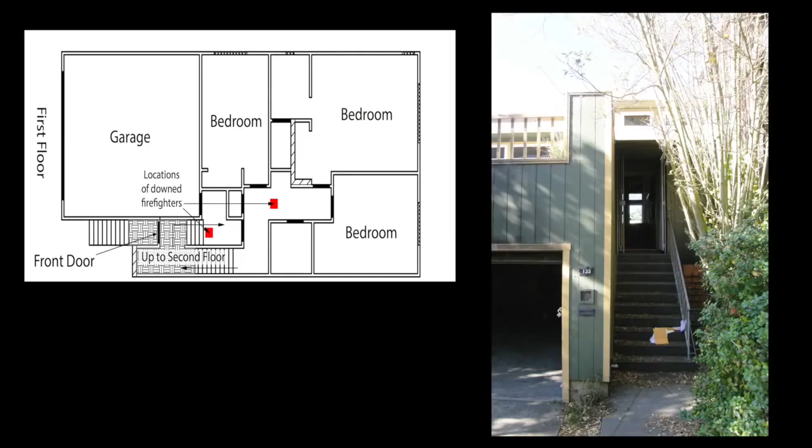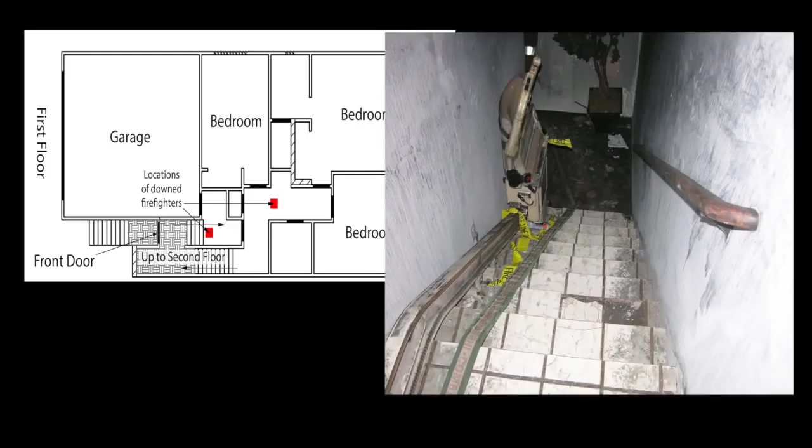At approximately 10:54, about 6 minutes after the arrival of Engine 26, Battalion Chief 9 followed the Engine 26 hose line up the front stairs, into the front door, and then down the stairs to the first floor or street level of the house. Battalion Chief 9 had a face-to-face discussion with the victims.

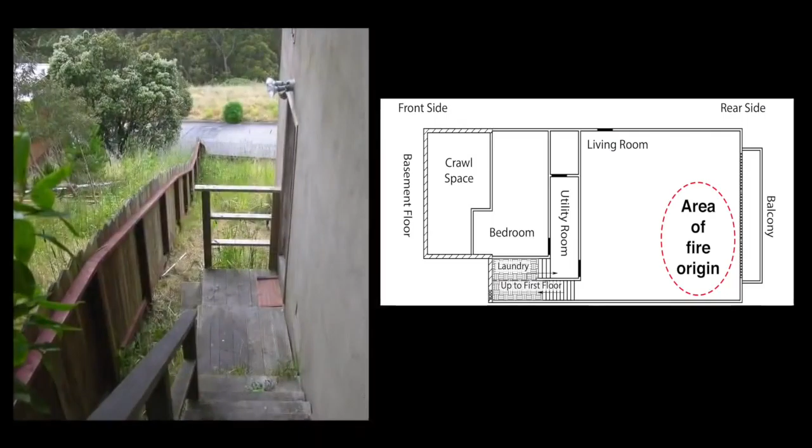During this discussion, Engine 26 confirms that the fire is below them, and Battalion Chief 9 indicates that the attack will be made from the basement level on the B side. The battalion chief exited the building.

Engine 26 remained in position near the top of the stairway leading into the basement. This was the last communication with the Engine 26 crew members inside of the structure.

Within 11 minutes of Engine 26's arrival on the scene, the large windows that made up most of the side C wall of the basement level began to fail due to heat from the fire. As the windows broke, fresh air mixed with hot fuel-rich gases in the basement, which increased the heat release rate of the fire. The increase in heat release rate resulted in the rapid failure of the 6 window panels. It took less than 2 minutes for all of the windows to fail.

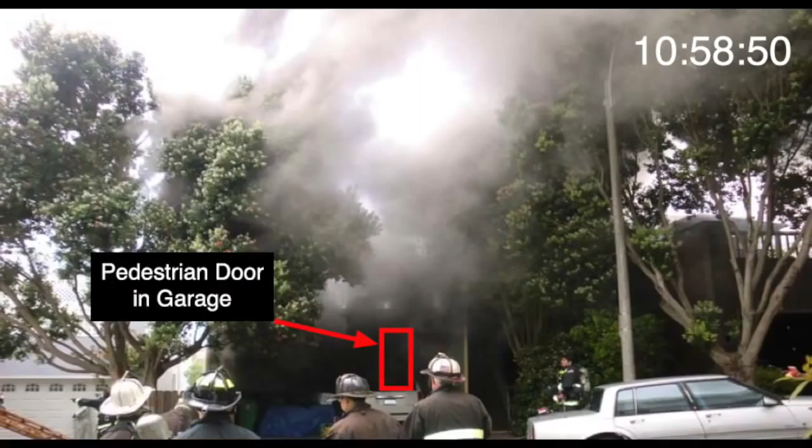After the rear basement windows began to self-vent, Engine 24 and Rescue 1A tried to make entry through the pedestrian door in the garage to attack the fire, but they were forced back by extreme heat and heavy black smoke. With the pedestrian door between the garage and the first-floor hallway open, heavy black smoke began flowing out of the open garage door at street level on Side A.

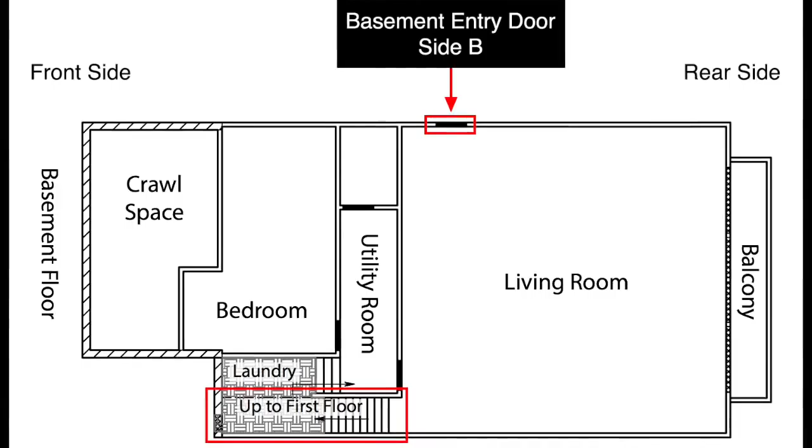Within a minute of this change, the Side B door on the basement level was forced open. Battalion Chief 9 reported heavy fire and smoke. Engine 11 tried to make entry into the basement, but they were forced back by the heat. Battalion Chief 9 requested a second hose line.

Incident Command attempted to contact Engine 26 several times via radio, with no reply. By 11:02, both Engine 11 and Engine 32 had made entry through the Side B door into the basement and initiated suppression operations.

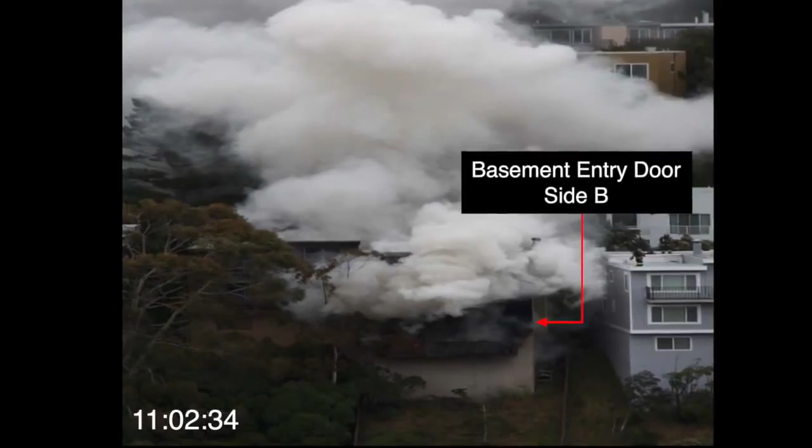At approximately 11:08, the lieutenant and firefighter paramedic from Engine 26 were found in the first-floor hallway between the top of the stairs from the basement level and the door to the garage. Both of the Engine 26 crew members died of their injuries sustained in the fire.

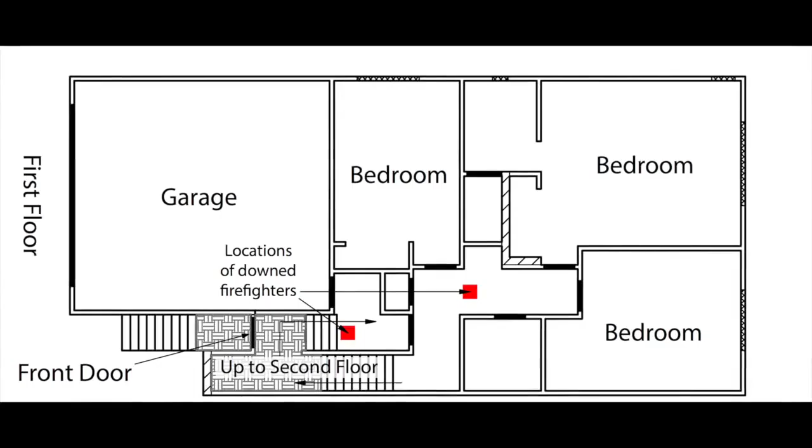NIST's Fire Dynamics Simulator, or FDS, was used to provide insight into the dynamics of this structure fire. The results of an FDS simulation are visualized with another NIST program called SmokeView. The inputs and details for the FDS simulations are documented in NIST Technical Note 1856.

The fire started in the basement, near the balcony windows on the rear of the structure. The fire spread to a large sectional sofa in the center of the basement living room area.

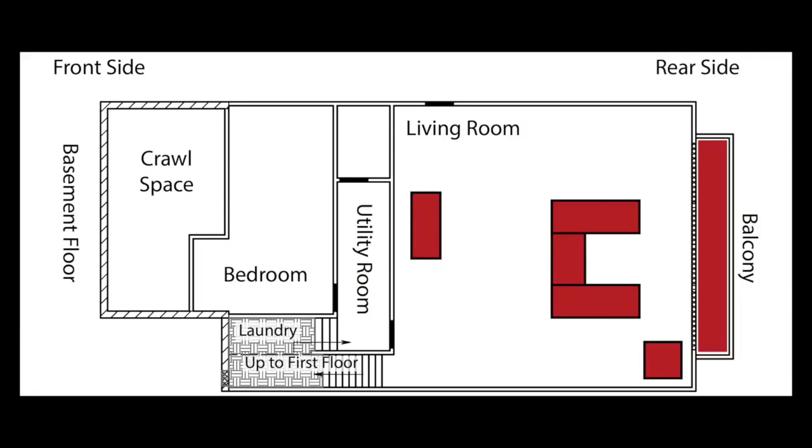Based on an assessment of the fuel load in the burned area of the basement, the estimated peak heat release rate of the furnishings and interior finish was approximately 20 megawatts. However, the lack of oxygen limited the fire growth until the rear basement windows vented.

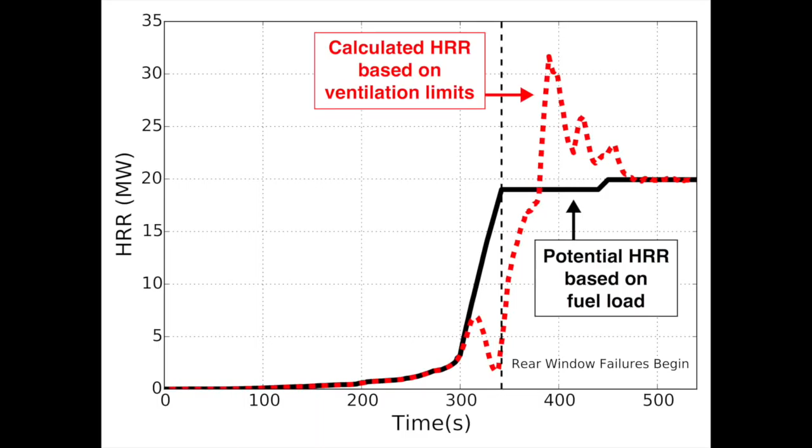As seen in the heat release rate graph, after the windows failed and allowed additional oxygen to mix with hot fuel gases in the basement, the fire rapidly increased from less than 5 megawatts to more than 25 megawatts in less than a minute after the first window self-vented.

The comparison of a photograph from the incident and from the simulation shows the condition on the front side of the house at street level, as the rear basement windows were self-venting.

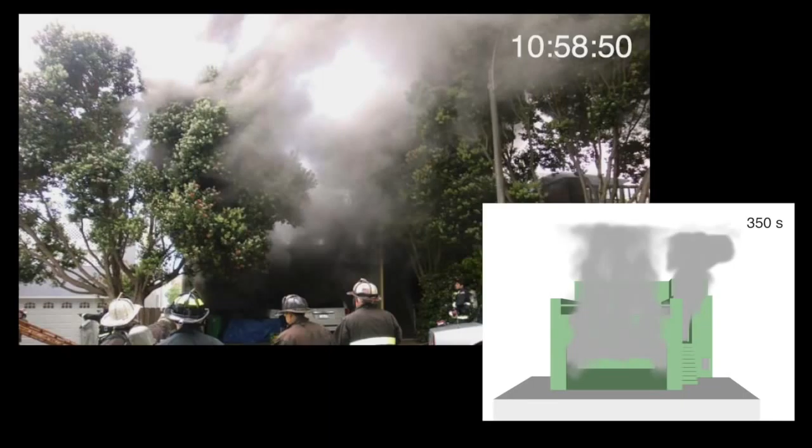Now we will use output from the simulation to understand the flow path within the multi-level structure. Fire gases move from regions of higher pressure to regions of lower pressure.

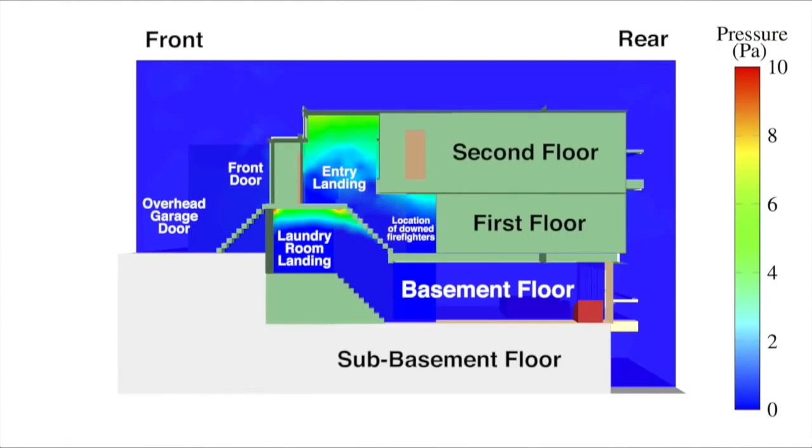This video shows the pressure plane along the center of the stairway from the basement to the laundry room landing between the basement and the first floor. An estimate of the pressure increase is shown before and after the first basement window failed.

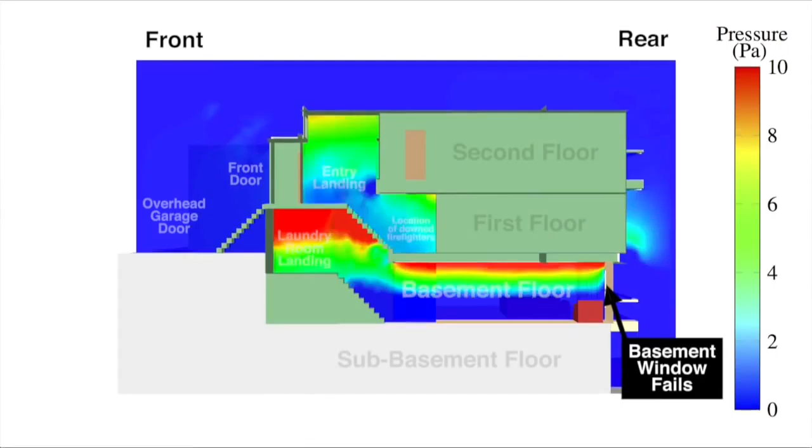This video shows the pressure plane along the center of the stairway from the basement to the laundry room landing between the basement and the first floor. An estimate of the pressure increase is shown before and after the first basement window failed.

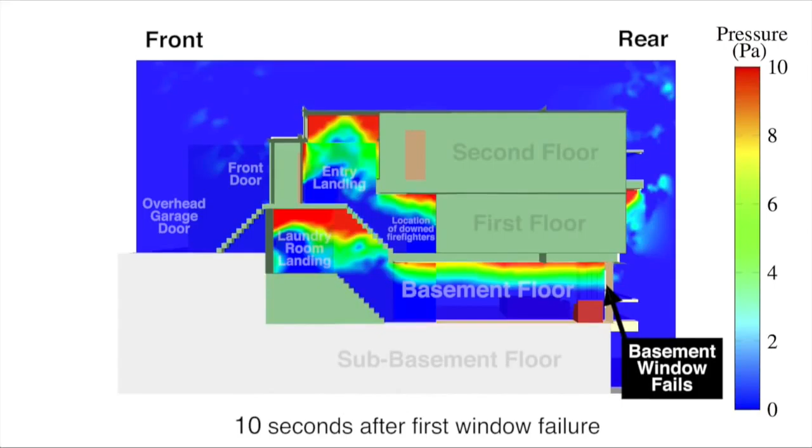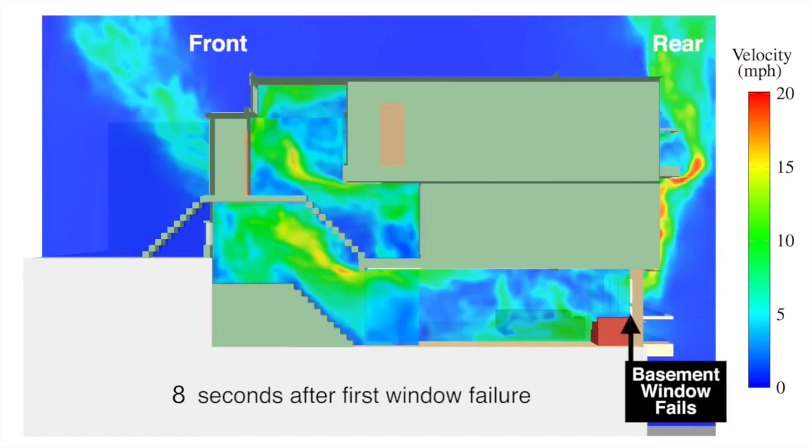One of the hazards to firefighters located in the exhaust portion of the flow path is convective heat transfer from the fire gases. Convective heat transfer depends on the velocity, the amount of turbulence, and the temperature of the fire gases. This video shows a comparison of gas velocity estimates in the stairway before and after the basement windows self-vented.

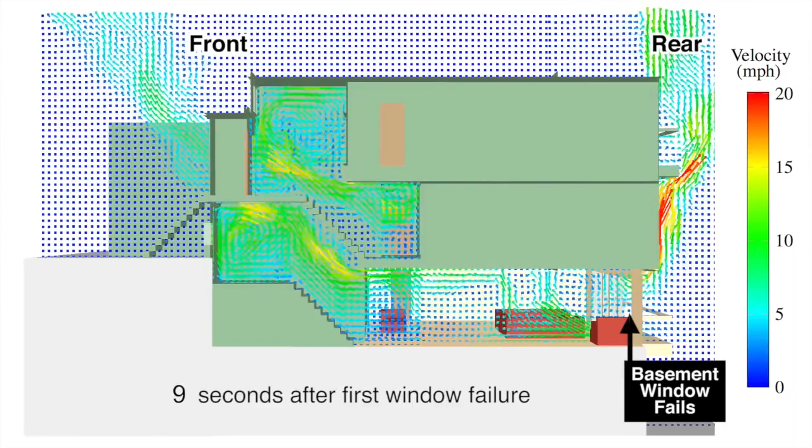Another way to visualize velocity with smoke view is by using arrows or vectors. In this video, the vectors show both gas flow direction and gas flow speed. This is also representative of the amount of turbulence or mixing within the flow path. Notice the gas flow circulation pattern on the landing, which indicates a very turbulent or well-mixed flow.

These images show the flow path from the fire on the basement level 2 minutes after the first basement window failed. At this time, all of the rear basement windows have failed. The hot gases in the basement are flowing up the stairwell, then splitting on the first floor, with some of the flow continuing up another stairwell to the open front door, and the rest of the hot gas flow moving out of the open pedestrian doorway through the garage.

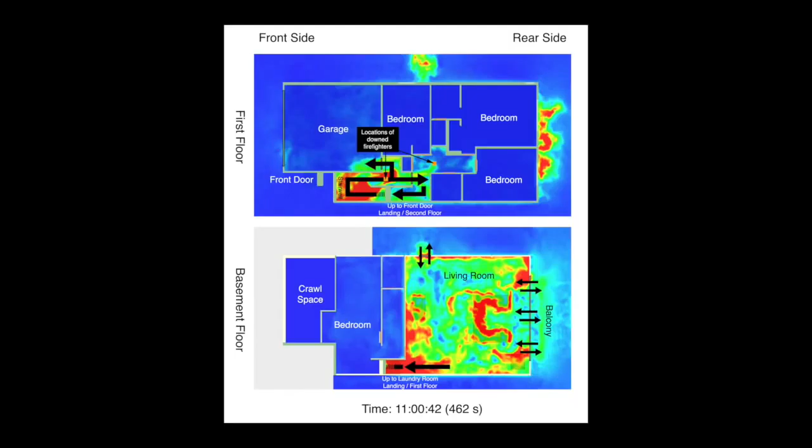Notice that the open basement windows on the rear of the house serve as bidirectional vents, with fire gases exiting the upper portions and air entering the lower portions. While on the front side of the house, the front door and the door to the garage are unidirectional vents, serving only as an exhaust for the fire gases.

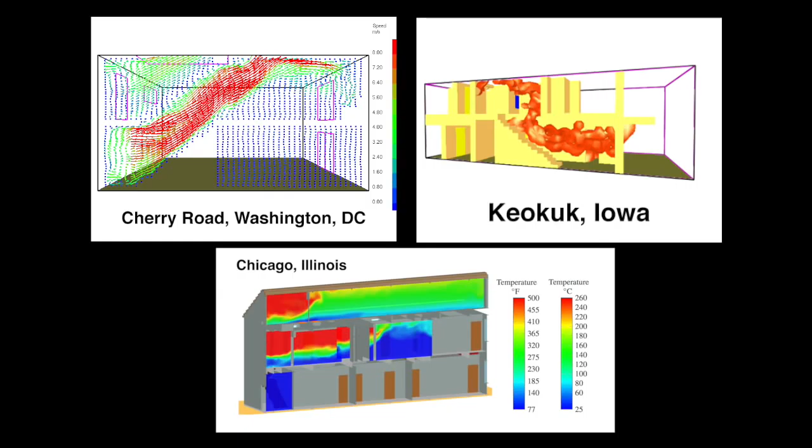There have been many previous fire incidents in which changes in the flow paths have had an adverse impact on firefighter and occupant safety. Fires with rapidly developing or changing flow paths are a significant hazard to firefighters. The development of a flow path could be caused by the failure of a component of the structure, such as a door, window, or portion of a ceiling, wall, or floor.

Environmental conditions, such as wind, can generate hazardous thermal conditions within a flow path. Stay upwind of the fire or keep the wind at your back. Uncoordinated ventilation or uncontrolled doors can also be the cause of increased thermal hazards within a flow path.

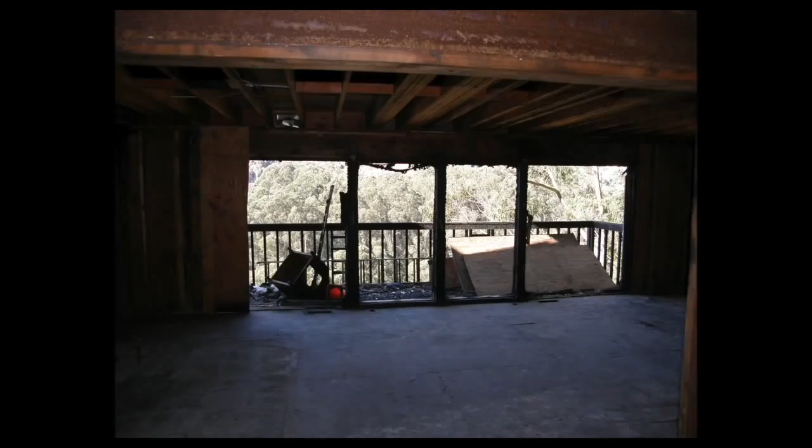In this fire incident, the thermal degradation of vinyl-framed windows and sliding glass doors resulted in the self-venting of a wall of windows 19 feet wide on the rear basement wall. The window opening allowed hot gases to flow out of the windows and mix with oxygen, which enabled the fire to spread up the rear of the structure.

Oxygen entrained into the structure enabled additional fire growth in the living room area of the basement. Failure of the rear windows resulted in a rapid increase in temperature, velocity, and mixing of the fire gases in the stairs and the first floor hallway. Conditions changed from tenable to untenable within seconds.

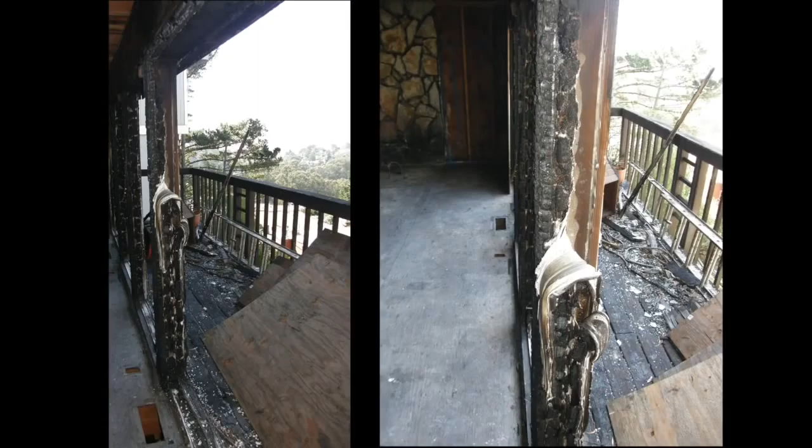Prediction of the failure mode and failure time of a building component is not a reasonable expectation given the large number of unknowns that firefighters face on the fire ground.

Research has been conducted by NIST and UL with fire departments across the country on exterior fire attack. The studies have shown the importance of scene size-up prior to beginning interior fire operations in order to choose tactics that would not only be the most effective, but also increase the safety of the operations.

The experiments in single-family homes have shown that once the basement fire was located during size-up, the most effective fire attack was made from the same level.

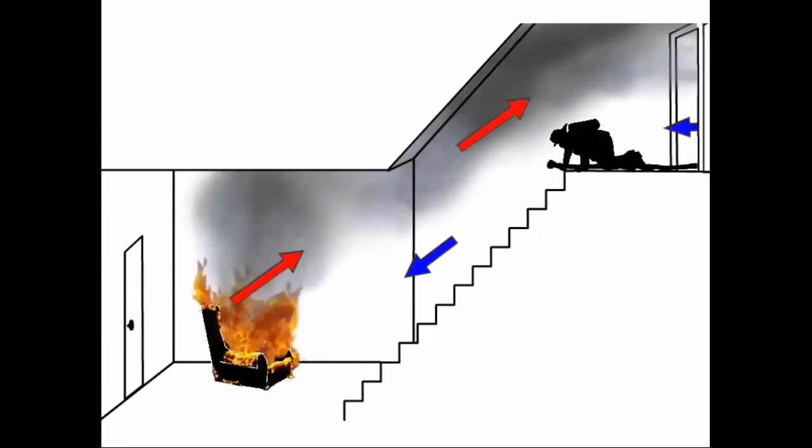When sizing up a structure fire, choose your tactics with potential flow paths in mind. Recall that in a flow path, the hot gases move from a region of higher pressure to a region of lower pressure. Firefighters located in the flow path downstream of the fire can be exposed to lethal levels of heat.

Firefighters positioned in the flow path above the fire are in a high hazard and potentially deadly location. It is critical that tactics are chosen so firefighters are not caught in this position.

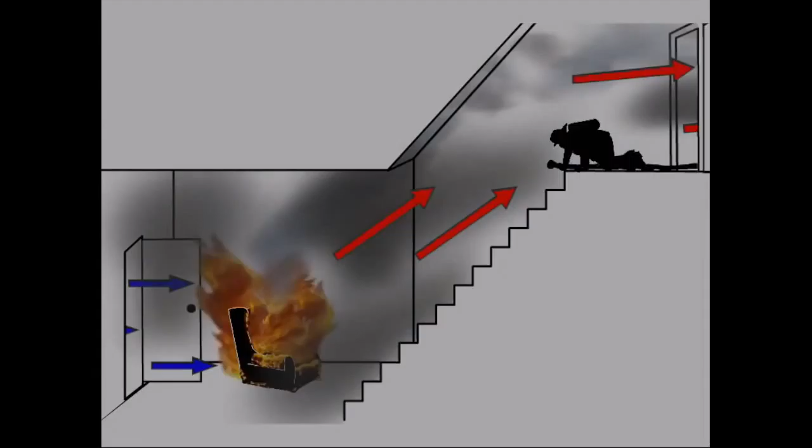For more information on this incident, see NIOSH Report 2012-28, San Francisco Fire Department Safety Investigation Report, Incident 11050532, and NIST Technical Note 1856. These reports and other information on flow paths and fire dynamics can be found on the NIST Firefighting Technology website.